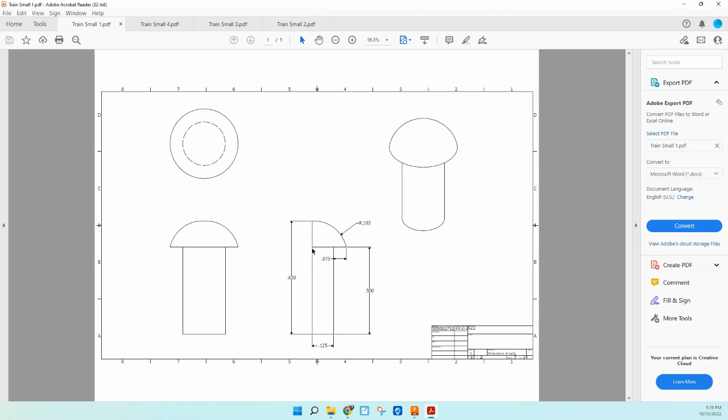Then we'll do a radius of this 0.193. Because it's an odd radius, and I don't think the length here is 0.193 on either one of those, we're going to have to use our trick that we learned in the last bit with the stacks. Okay, so here we go. I'm going to go ahead and go from the front this time.

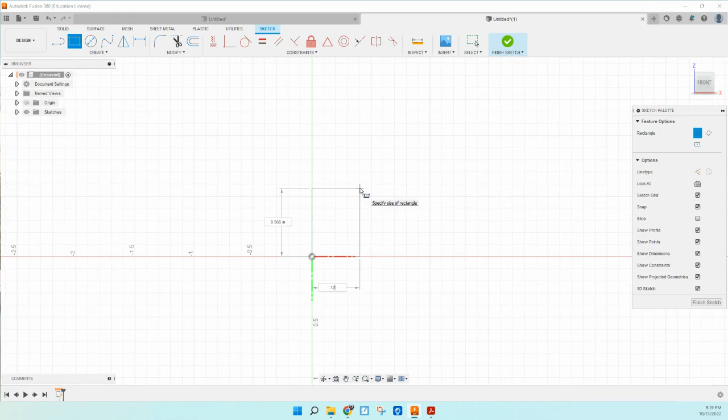Oops, I did the side there, the angle. That's weird. All right, I'm going to zoom in a little bit, make a box. And this was 0.125 wide by 0.5 tall. Let's zoom in a little more. Now we're coming out this way according to the instructions or the drawing, 0.075. And then we'll go high.

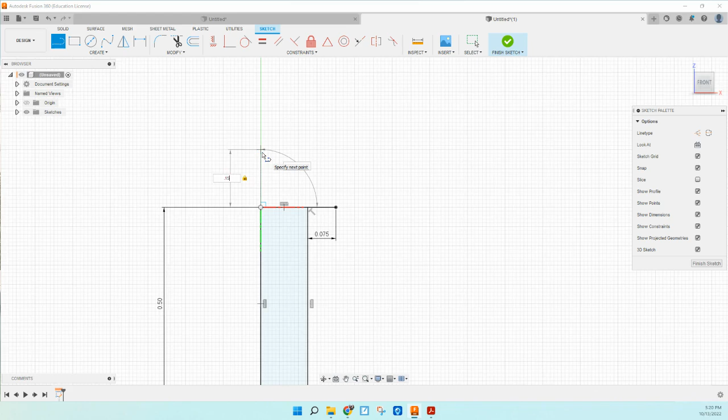The difference was 0.15. Add that to 0.5, we get the 0.65. Okay, there we get the whole thing. Now we're going to do a radius here of 193. That's 0.193. So if I take 0.193 on my handy dandy calculator, times it by 2, I get 386. So we're going to do radius.

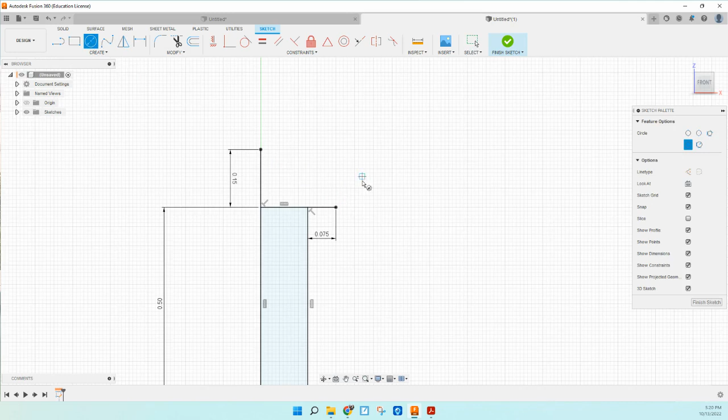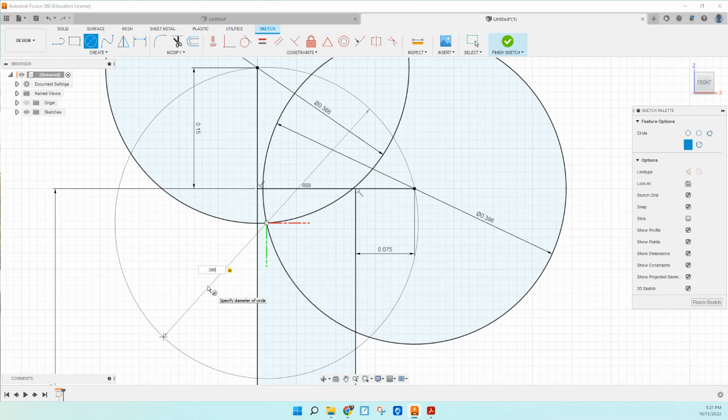No, we're not going to do radius, we'll do diameters of 0.386 3 times. Once there, there. And then again, this is going to be a concave, so we're going to come down here. Be careful that we don't choose this one here. Make sure you're doing the intersections of the circles. 0.386. And then let's clean up.

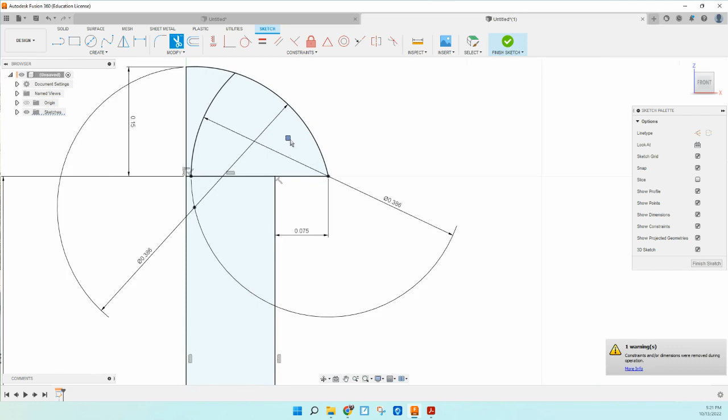Make it look nice. Get rid of all of these extra lines that we don't need. I'll zoom out a little bit here. Get rid of these guys. Zoom in here. Get rid of this one and that one. Pretty straightforward. Looks like we got all of our pieces. We're going to clean that one up too, so it makes the top here.

We'll go ahead and finish the sketch. Use revolve using this axis. Click OK. There we go. That is it. Small part number 1.